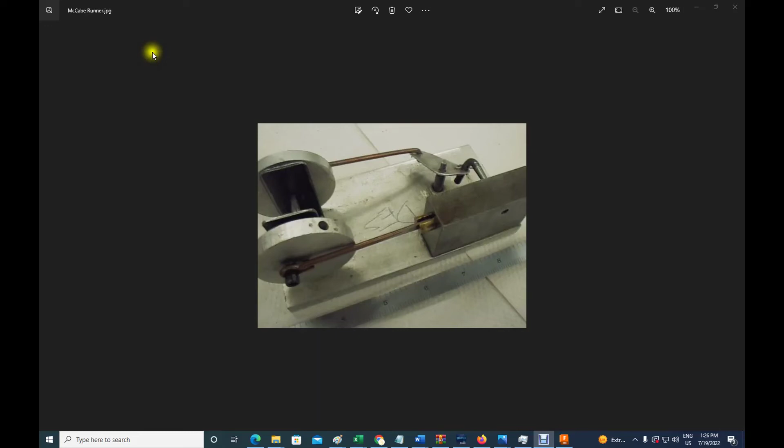Good afternoon, YouTubers. Today I'm going to be presenting to you this animation of the McCabe Runner. It is a little steam engine, very small, but it gets the job done. I really like it because it's basically one piece for both the timing valve and the piston right here, and it uses two flywheels and a rocker arm.

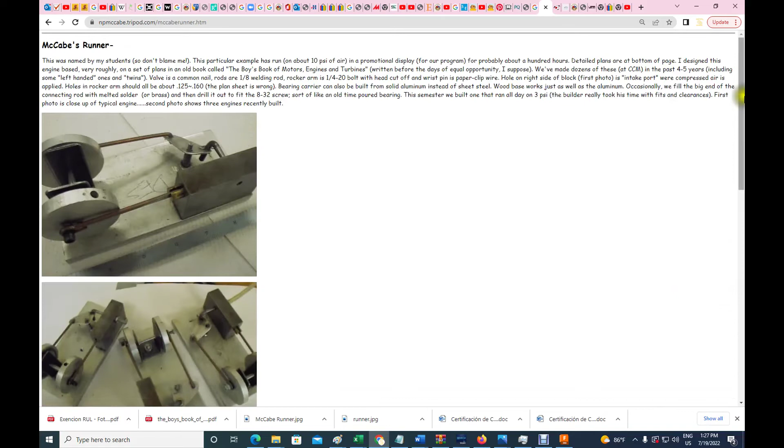This design comes from this web page, npmccabe.tripod.com. So it's right there, and there are many designs here, and the one that I picked was the McCabe Runner. Really like that one. You hit there, it gets you many pictures of many designs as shown here, and it also includes the blueprints. Excellent. Better resolution here, and you have the blueprints to create your design.

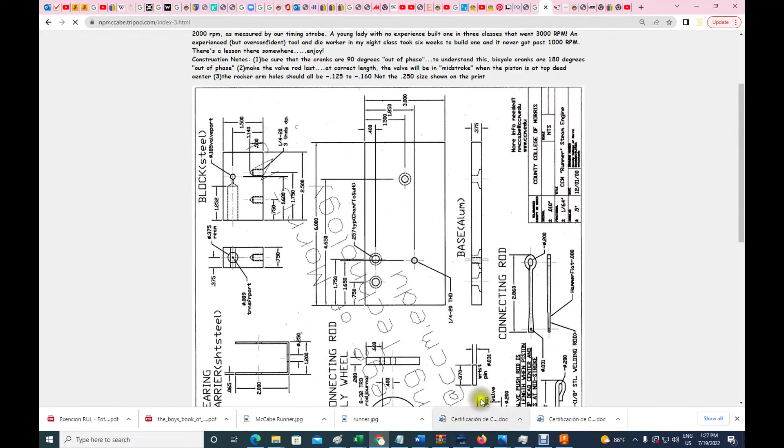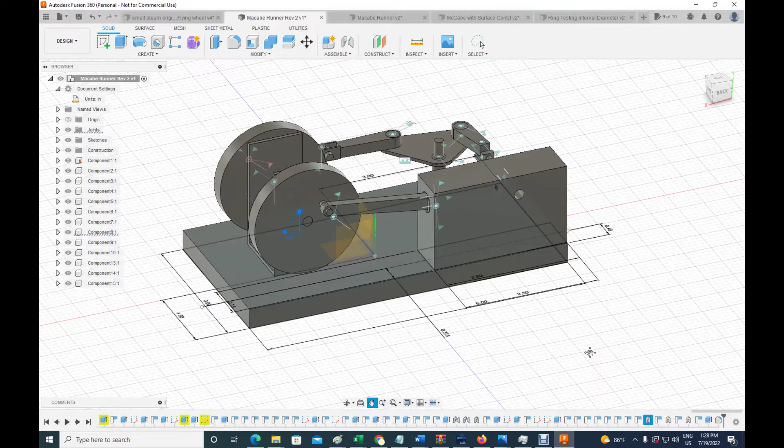Actually, I think I have it here, let's see, better this one. Basically you have pretty much the design of the base, and the block for the piston and the valve connections and everything else. Here's the rocker arm, and if you follow this, which is basically what I did, you end up with something like this in Fusion 360, which is kind of nice. From here, going to 3D printing should be straightforward.

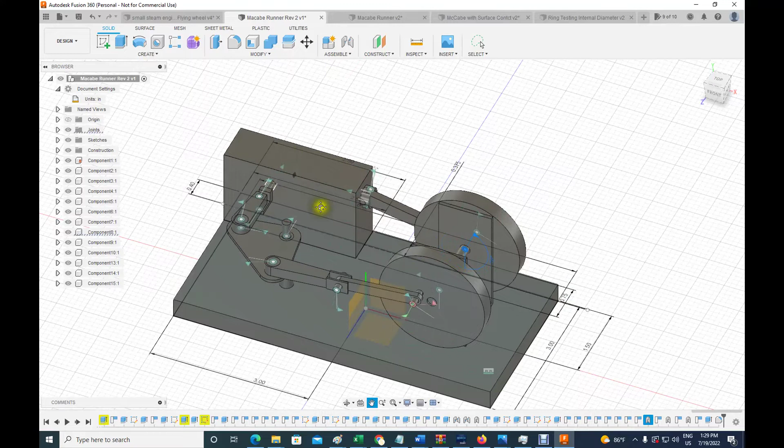I might do this in 3D printing, but instead of this kind of design, I might go with only one flywheel, to save some PLA, and another cylinder here close by. Not this particular design, but I'm thinking about it. But let me discuss a few things so you can appreciate this work of the McCabe Runner. So this is as shown here.

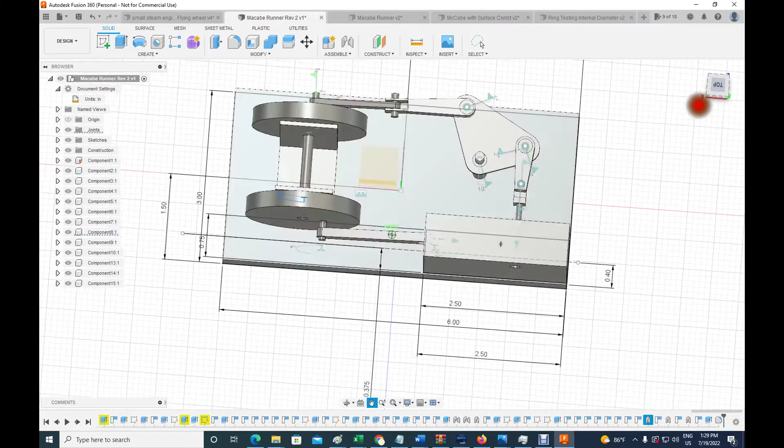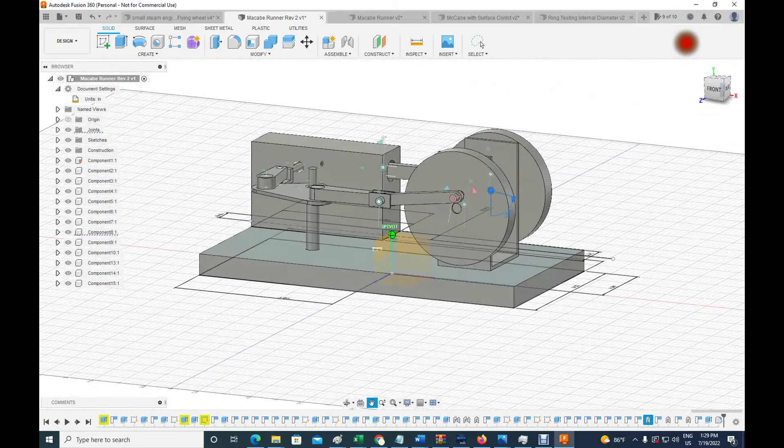Let's see the dimensions of this guy. We are talking about basically 6 inches by 3 inches, and so forth. You start to use the blueprints and get the connections the way they are. As always, timing is a big deal on this design, so it took me a little while to synchronize them, to ensure the rocker arm position and everything else is the way it should be.

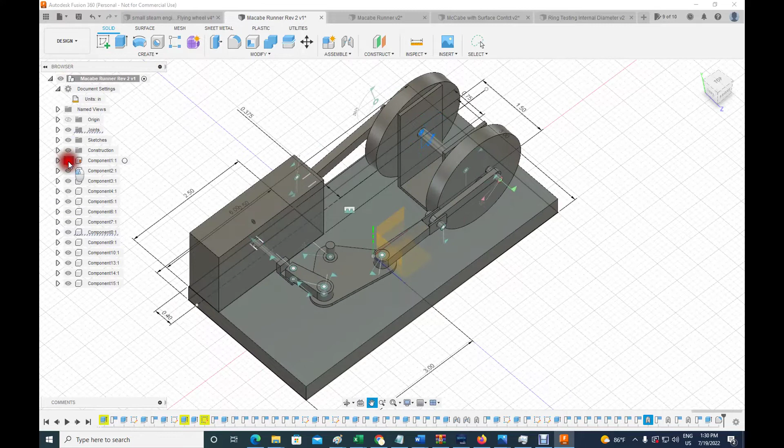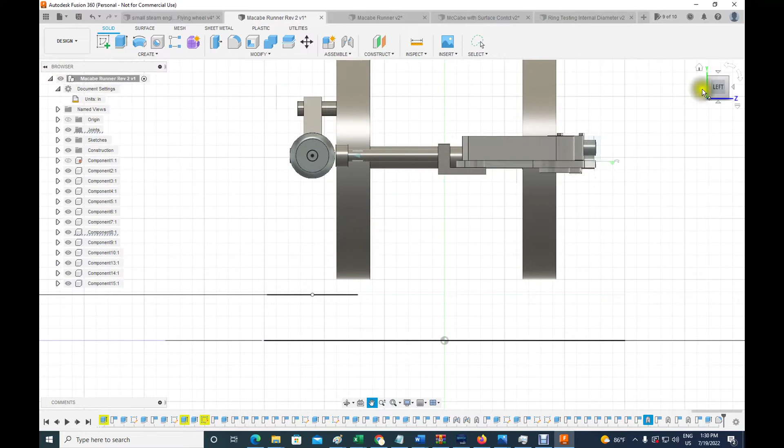For example, let's get this component out of the way so you can actually see what's really happening here. That little spot there is the hole between the timing of this valve and the push in and out of the piston. Let's move a little bit sideways so you see what I'm talking about. You see? Now, let's stop this animation for a second, escape, and let's do it by hand.

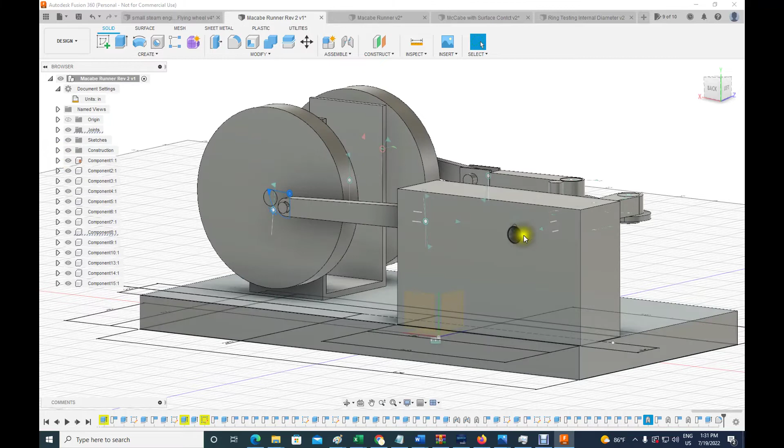Here we go. When the piston is right at the bottom, you want air, or steam, to go in. The steam will go this way. This is the entrance of steam or air, whatever you want to use. Get that out of the way, and the valve at that point needs to start opening. As soon as I move this flywheel in the right direction, this valve needs to go, sorry, actually that way. This valve needs to go down.

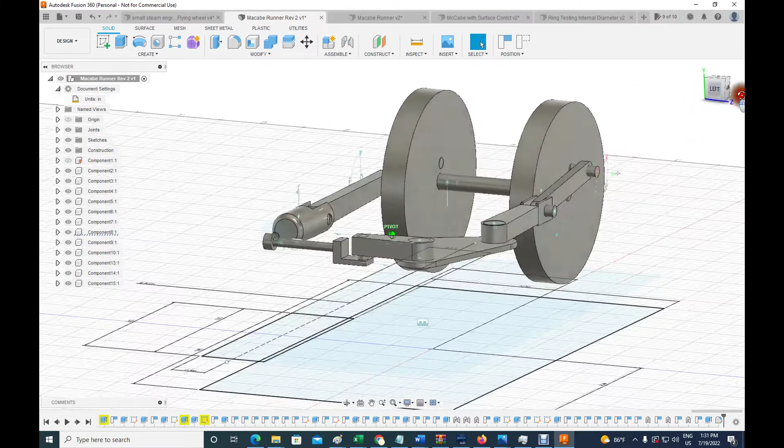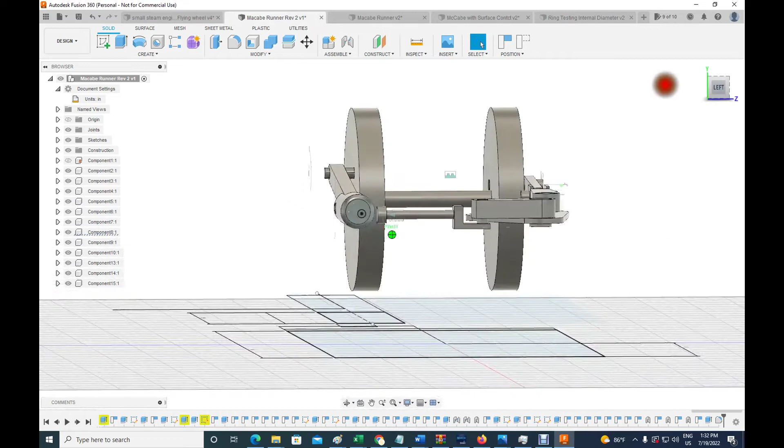Let's see if it's true. You see, it's going down because this flywheel turns clockwise. Now what's happening there? Since steam is going this way, now this is out of the way, and that air will start to rush in and push the piston up. As shown here, the piston is moving up and the valve is moving down, meaning more air can get in easily. Take a look here. That's what's happening.

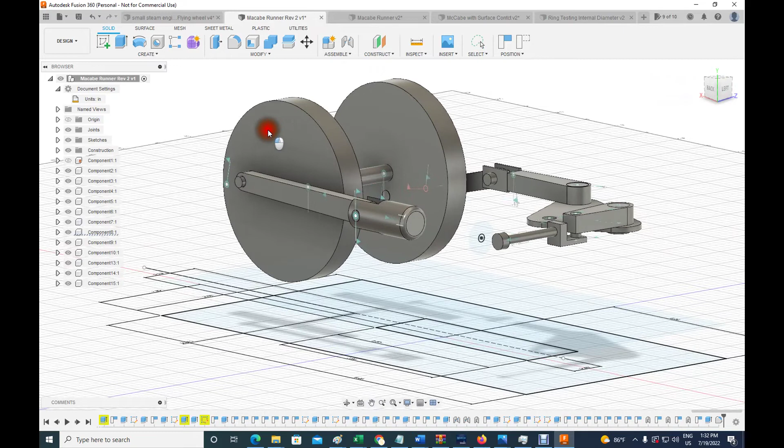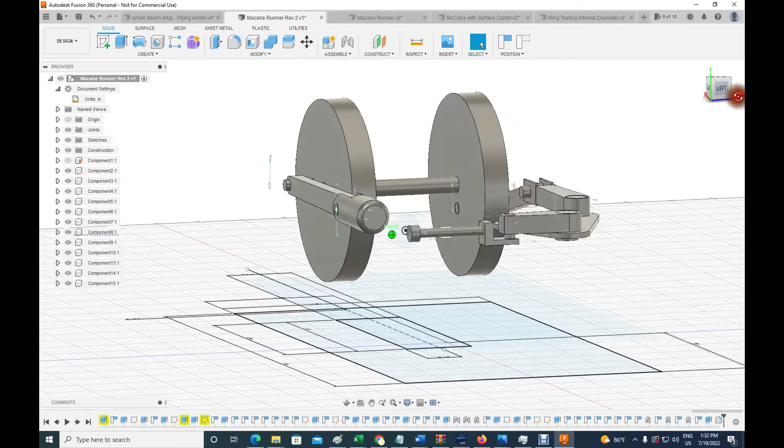Now we keep moving this guy. You get to a point where the valve starts to close, but air, or steam, is still getting in until you get to the bottom. Now at the bottom, it's totally closed. Air or steam cannot get in anymore. In that case, this valve needs to open. So this will move to the left, and in doing so, as you can see, this valve has a recess that will allow air to go through it. So air or steam will escape this way to the right.

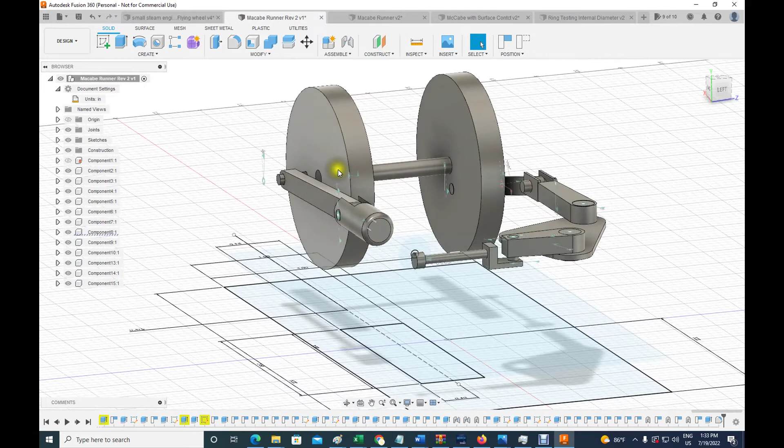So that's how this looks. Let's give it more of a turn. Now if I put this back, you will see that all the time the piston is traveling down, the valve is moving. The valve as shown here is moving to the front. Let's move this a little bit more. You can see there, until you get to a point.

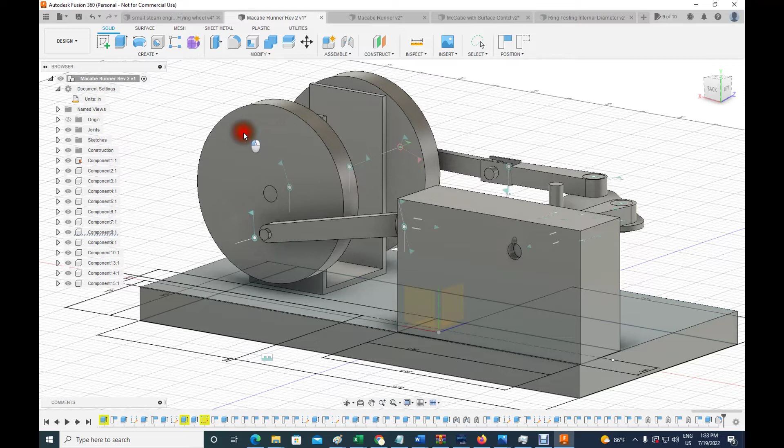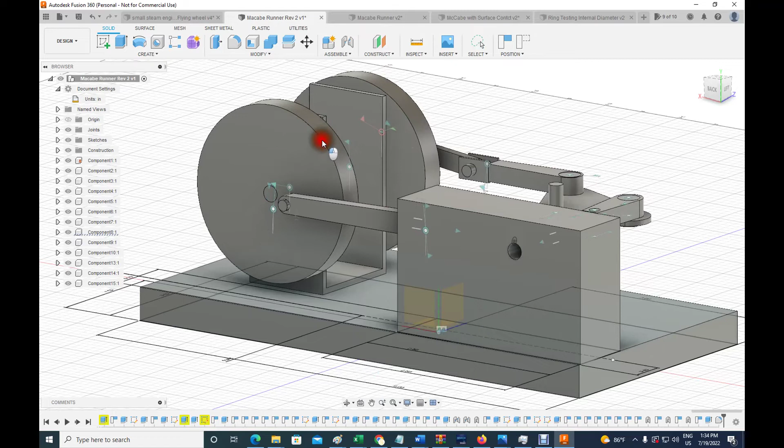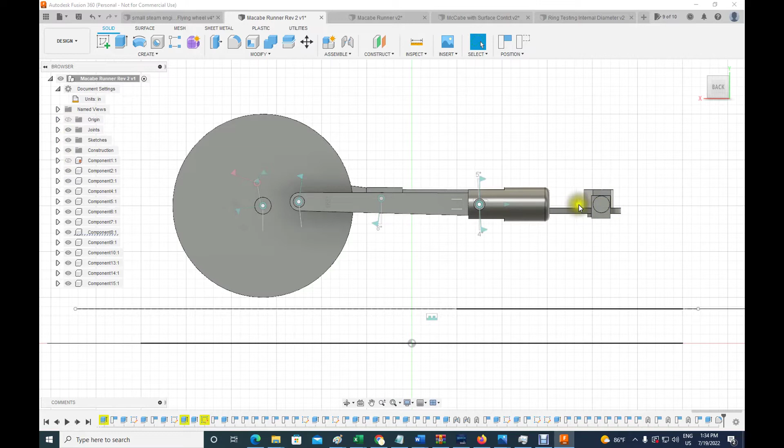Now the piston is still moving down, but the valve is moving to the other side, trying to open the entrance of air or steam when the piston is at the bottom right here. If I take a look here, it's pretty much at the maximum distance. Let's get that one out. You see, it's pretty much straight. So now this hole should be closed, but it's actually opening again, just so air can rush in again.

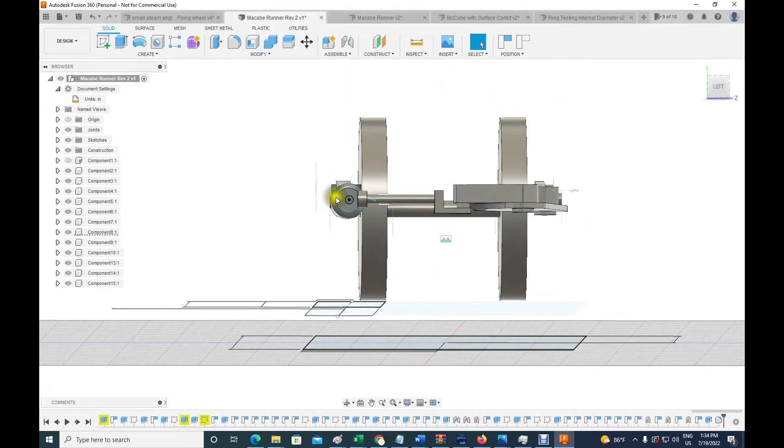If I keep turning, yep, that's how it goes. Now it's fully opened, so air can get in and push the piston until the cycle repeats itself. And that's basically how this McCabe Runner looks in this animation.

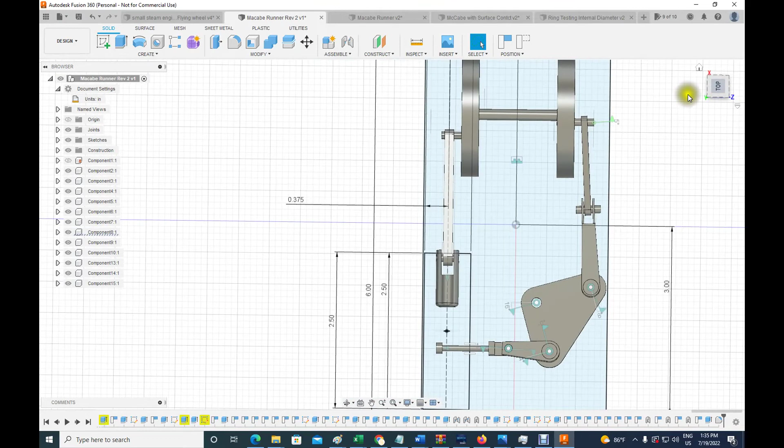The rocker arm, as you can see here, has one particular and interesting issue: it is not well aligned here. I didn't pay too much attention aligning this rod here, and that creates a little bit of a problem. Because these connections are stiff, they don't bend, so you have to allow for some of those imperfections.

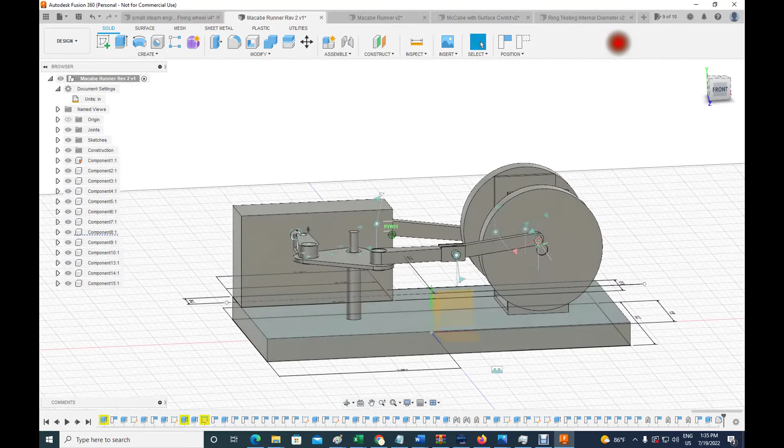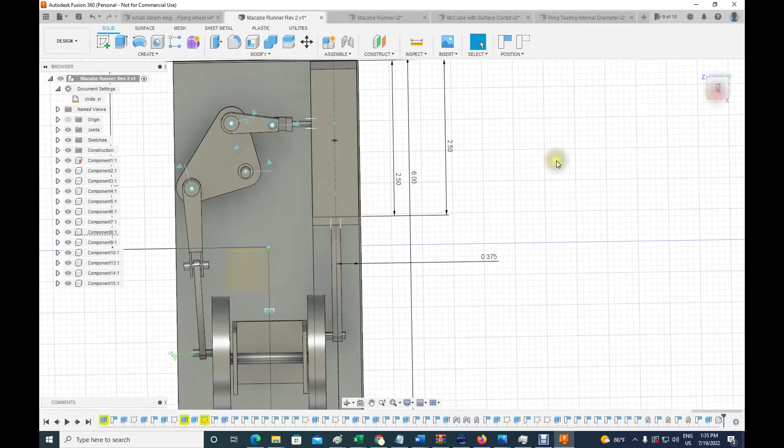This particular one is the only one that has a different color, meaning it is a different joint. I could use any of the regular ones, but since there's a misalignment that I didn't pay attention to get correct, as you can see here, let's see it from the top. You can clearly see that it's not well aligned. These need to go out a little bit more, but I leave it on purpose.

Because in reality, you definitely will have some freedom, some extra movement here that will allow for those imperfections. So I leave it like that, because it's the natural way that things will work in real life. Everything else is as rock solid as it should be. There's no issue with the other joints. They are straight.

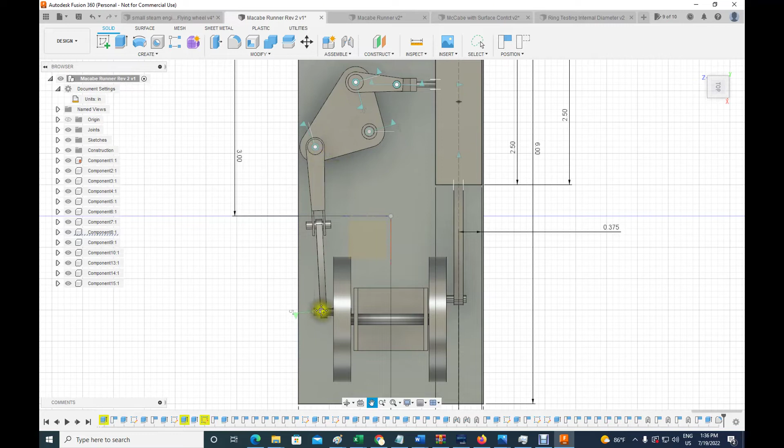They are based on the rigidity of the item that you're using, or the material. They're stiff. In other words, they don't bend unless you put a joint there, and then that will follow. But this particular one is a ball type of joint. It's a little bit different, and I want to be sure that you understand that type of joint, that it is a ball.

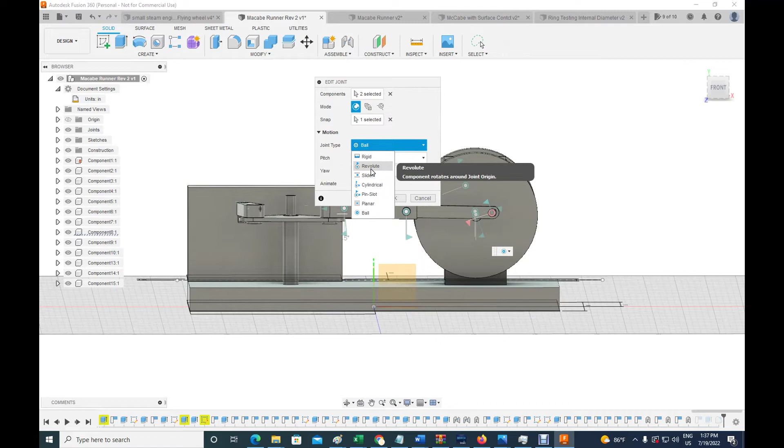I can change it. If I change it to, let's say, revolute, it will not work, because I don't have enough freedom on that movement, and the whole thing will get stuck. So leave it as a ball joint, and that will do. Okay, I think that's basically it. Actually, to finish this, let's do a visual style. Let's do a wireframe, and if I pick animate model, you can see,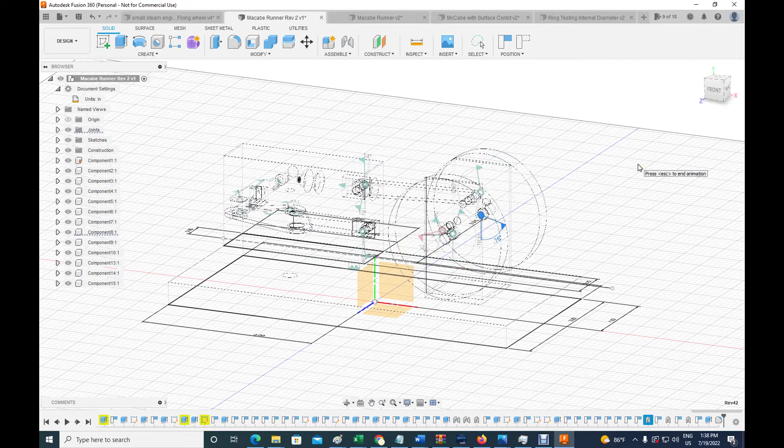here's the piston, and this is the hole that I talked to you about, the valve connection, so that air can get into it if you are doing an air engine. But it could be a steam engine. Everything is metal here. That looks kind of neat. I really like it.

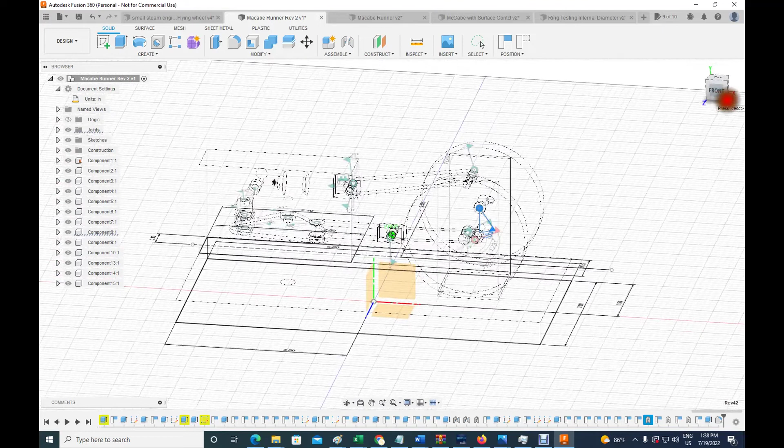It's small enough that it can definitely be something that I will 3D print. I will do some changes on it. I will not use the rocker design. I will use a more solid one, easier to deal with than the rocker. And we'll see. But I really like it.

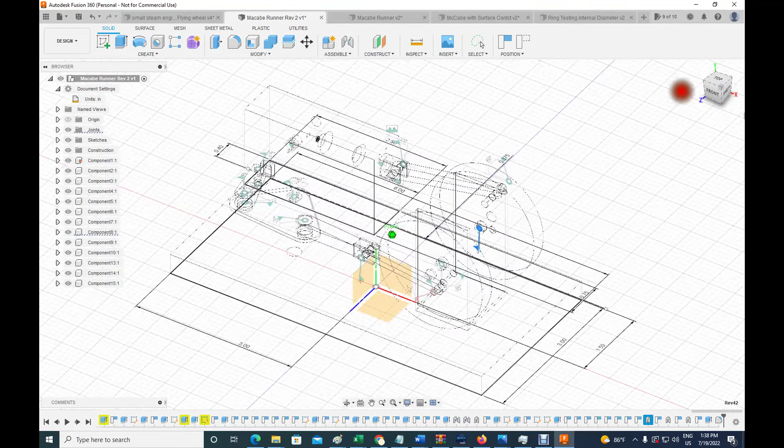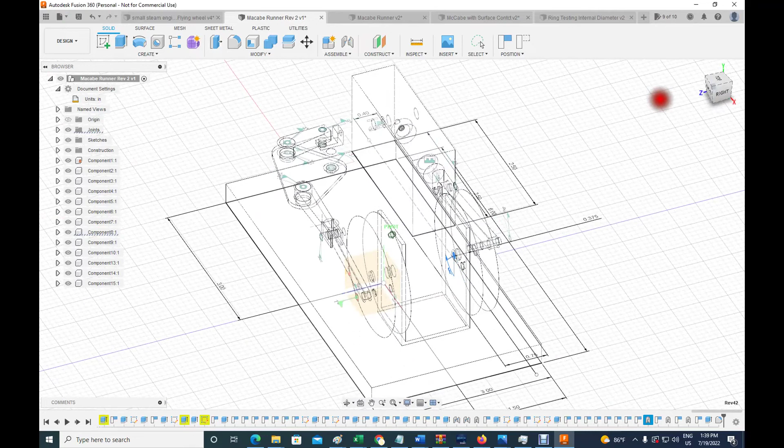So let's see what else we can do here. Visual style. That looks better. And that one, I don't like that one. That's the normal one.

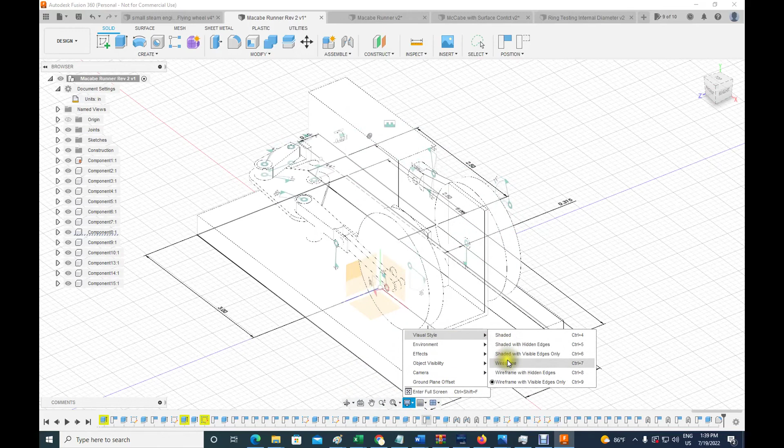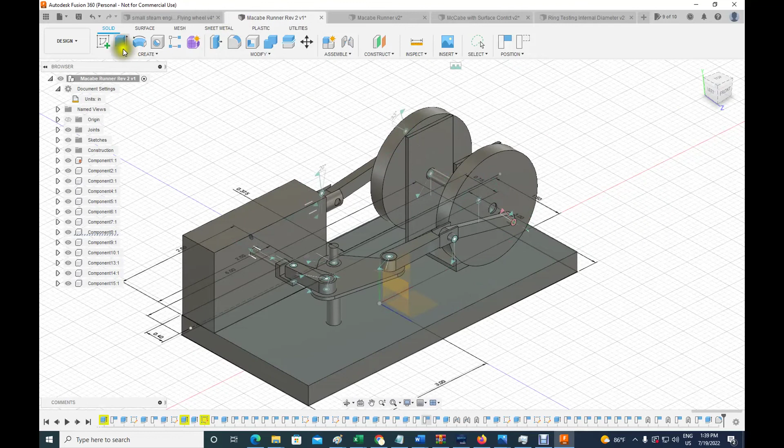So I guess we have covered all the bases on this design, which is very straightforward. I didn't use the sheet metal. I went with regular solid stuff, like for the axle and whatever is going to be holding the axle. That's well described if you go here, this part here, the bearing carrier.

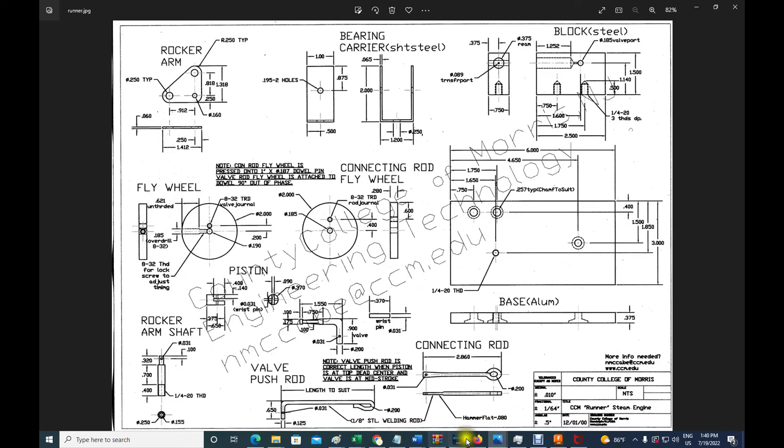How will you do it? I did it based on this, and this rocker arm I also did with the regular solid design in Fusion 360. No more than that. Then the connecting rods were as required to get the job done. Let's go back again to Fusion 360.

One last thing I will say on this: I originally tried to use enable contact sets, but the more I used it, the more I felt like I didn't like it. The behavior is kind of nasty. It is not as smooth as when you use joints. When you use contact, I don't get the right feeling that it is working the way I want it.

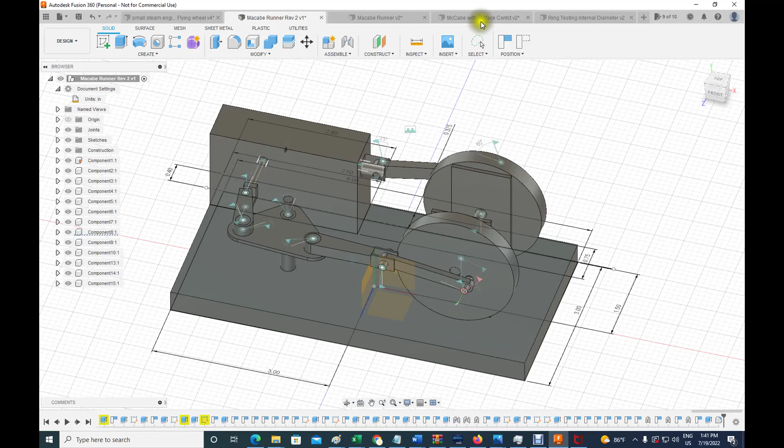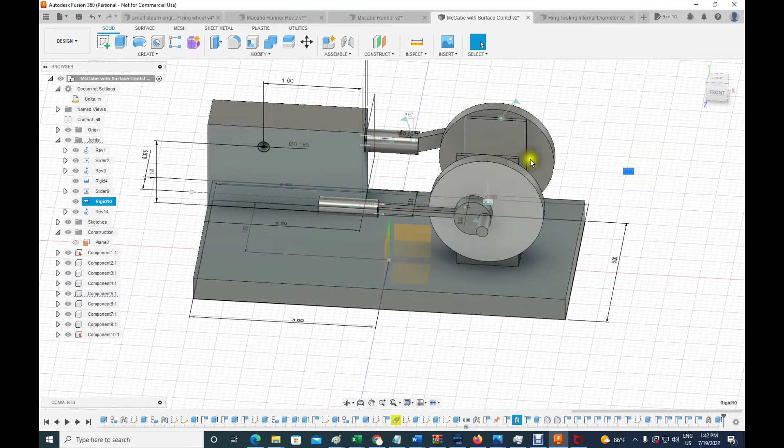Let me escape from here for one second. Let me see if I had it here. That version is right here. This is the version with a contact. Let me see if this still works. I'm not sure what stage this guy is. You see that?

It's pushing on this, but that jerking behavior of the contact really bothers me. I don't like that in the simulation, so I stopped there. If you like this kind of jerking, that would be okay. I don't, so that's why I stopped this design, because I thought to use this kind of contact.

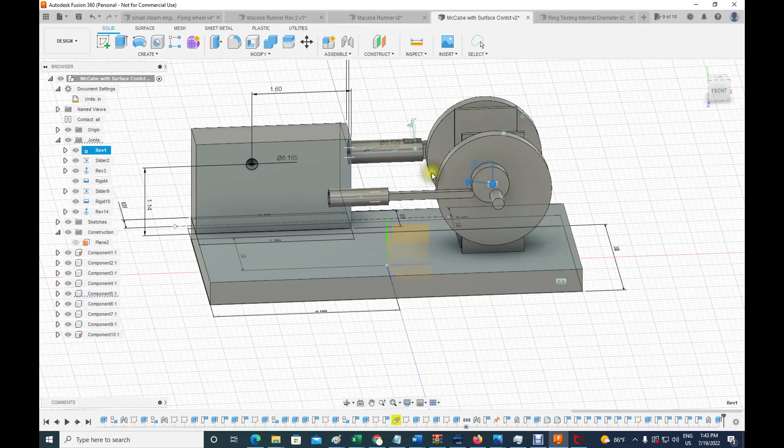I'm using an eccentric here to push on this rod that eventually will act on the rocker arm. But when I started the simulation, I said I don't like it. It doesn't do a good job; it just jumps very quickly to the other side. Maybe I can change the type of eccentric to make it smoother, but nothing beat the other design.

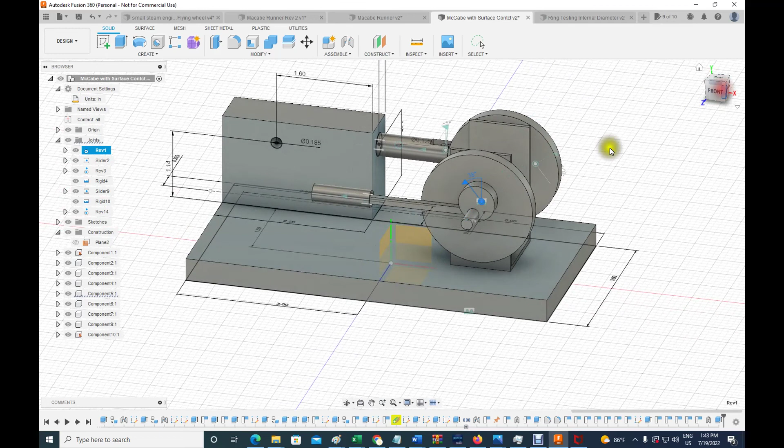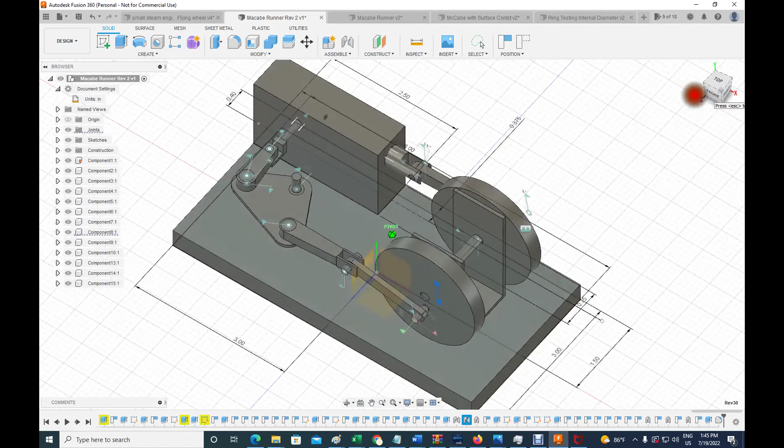I really like this design a lot better, this one. There we go. I like this much better. It is smooth all over, so I stay with this design. Let me see something else.